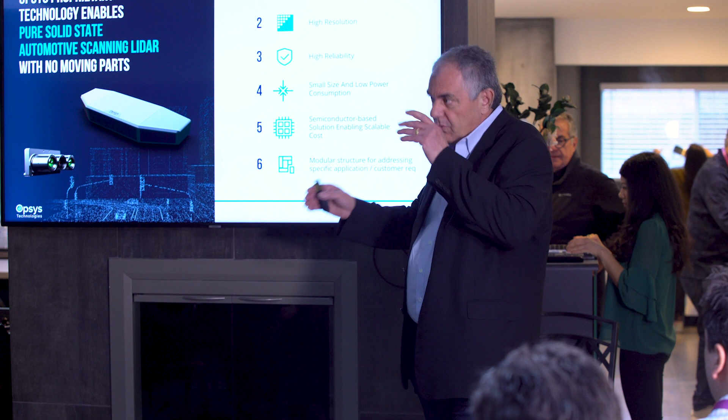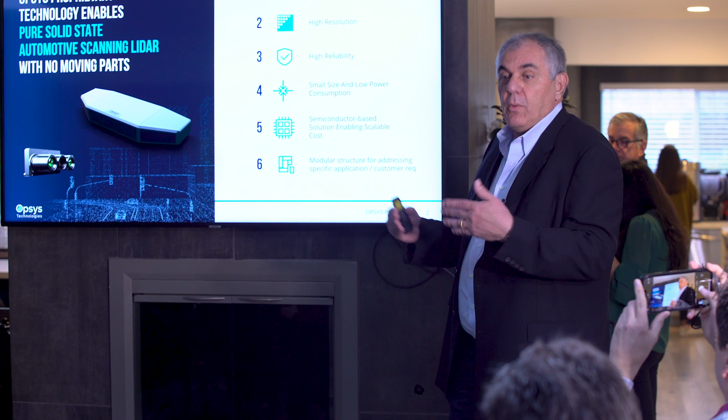So when we came to it, we said, first of all, we have to be very fast scanning. We want to give cars around a 30 hertz update rate of the field of view as a minimum. Mechanical LiDARs don't get there. Many devices at the show quote 10, 12, 20 hertz, but at maximum distance and maximum resolution, they tell you sub 1 hertz. Sub 1 hertz is not usable in automotive; you have to be above 10 hertz to be barely acceptable. We give fast scanning under all conditions.

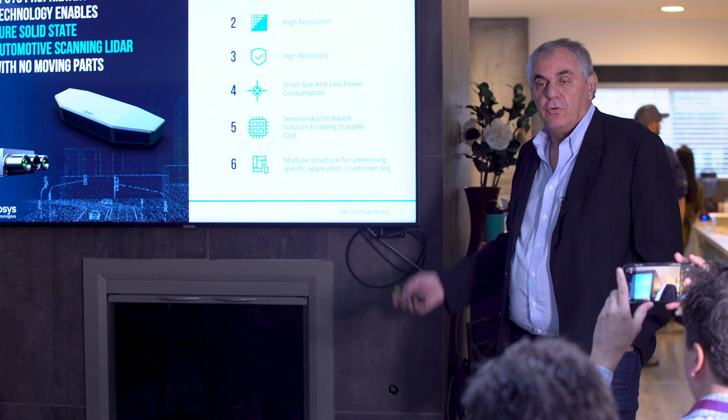Second, beyond high resolution and reliability, it has to be small enough and low power. It has to work over the full automotive temperature range, minus 40 to plus 85. It also has to be semiconductor based, so absolutely no moving parts, and made out of technologies which are scalable in production.

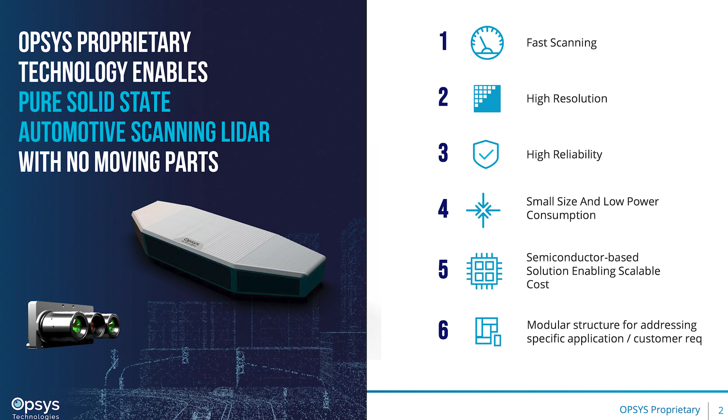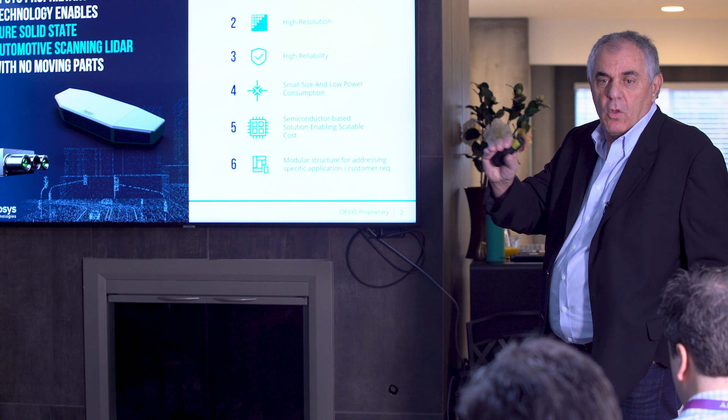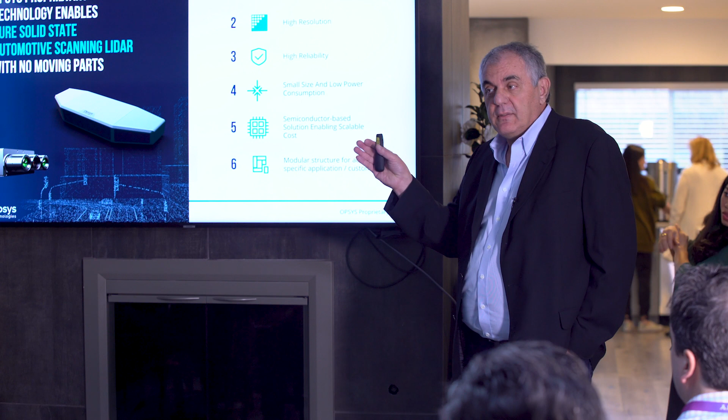So we chose the wavelength to be 905 nanometer, or around 900 nanometer. The reason is we wanted to use the laser family called VCSEL, a very efficient way of making lasers at low cost and large scale. Also, 900 nanometers allows us to use a silicon detector, basically a CMOS process, readily available everywhere. If we can accomplish a scanning LiDAR with no moving parts using those two material systems, it gives you the best of all worlds.

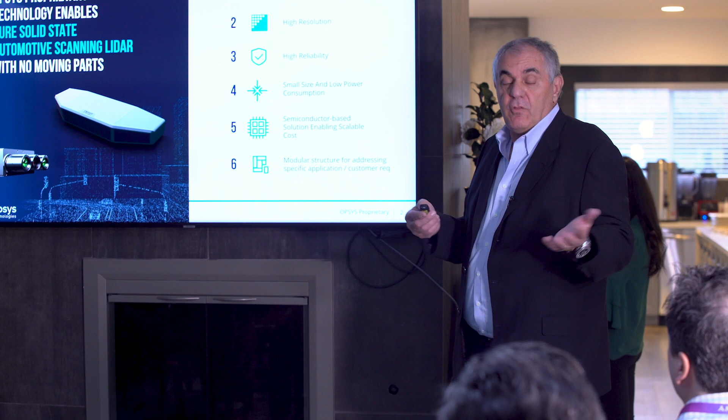So just for a status, we delivered automotive B-sample already in Q2 of this year to a number of customers around the world, Asia, US, Europe, and we're in advanced steps with many of them. One press release you see this morning is that Hasco, which is really an SAIC company, out of all the LiDAR companies chose to go with us, and that's going to go on the SAIC platform, so they're actually saying we're going to go to production in 2024.

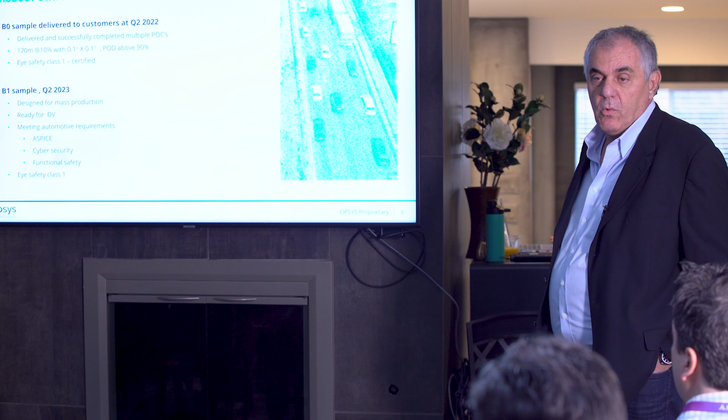Actually, it's limited by us. How fast can we go to production? They would go to production even faster. And in '23 in Q2, it's not going to be samples anymore. You're going to have the absolute final LiDAR, which incorporates all the automotive specifications, which is ASPICE, cybersecurity, functional safety, everything you need in automotive will be incorporated in our LiDAR.

So the first thing you say, okay, the LiDAR works by sending a beam, and all the other guys, when they scan the beam, they need a mechanical scanner to do it. How the hell are they going to do it? So the way it works is this. You can see that there's two squares on the side called addressable laser array, and one square in the middle called single chip SPAD. SPAD stands for single photon avalanche detector. Effectively, it's a very, very sensitive detector that can detect signal even at a single photon level, and it can be formed on a silicon wafer.

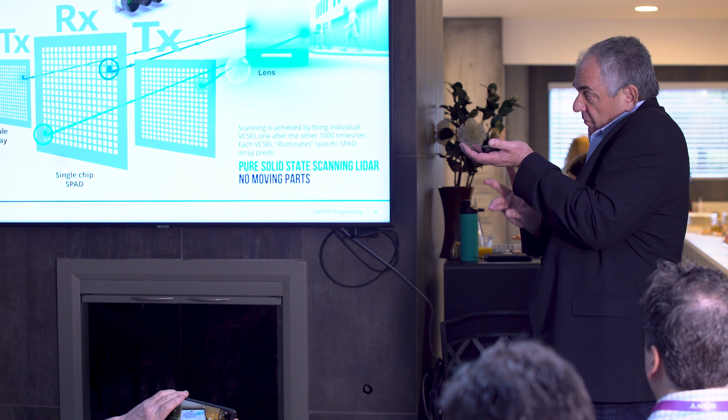On the sides, you see the array of lasers called VCSEL. VCSEL by itself is called vertical cavity surface emitting laser, but forget all the alphabet soup. Effectively, it allows you to grow the laser vertically in the wafer. When you grow the laser vertically, you can grow a lot of lasers next to each other. So you say, why aren't all the lasers like that? All the other lasers, you grow them horizontally in the wafer, and then you have to cleave the wafer and process them. That's a process that costs a lot of money, takes a lot of wafer real estate, and has a very low yield. 9, 10, 15% yield is like magical.

And the yield for VCSEL is just the inverse? I'm getting there. So the yield for VCSEL, because there's no post-processing, you grow the laser and it works. The yield is 95% plus. That's number one. You can't address everything in the world with VCSELs because VCSELs are not good for communication over long distances. But what VCSELs are perfect for is what we're trying to do, basically get a pulse of light and get it where we want it.

So what we have to develop is an array of VCSELs. We have thousands of VCSELs in there. But the array is structured so that if you define X and Y, like a checkerboard, we can control each laser separately. So it's a fully addressable matrix laser array. So what does it mean? If I put this chip in and assemble it, by a command from our internal processor, we can turn on any one of the VCSELs when we want, and then go to the next VCSEL, turn it off and go to the next one.

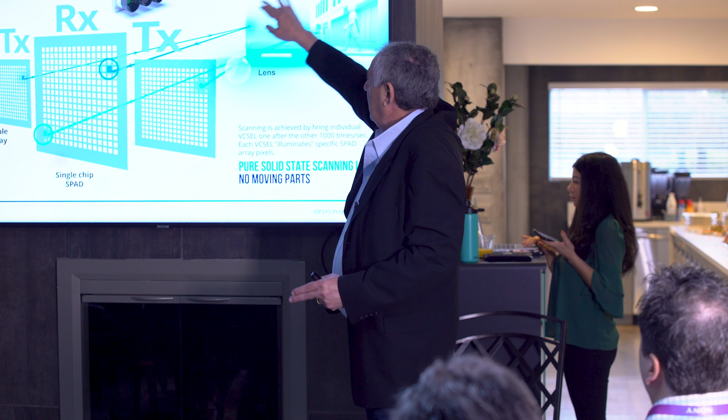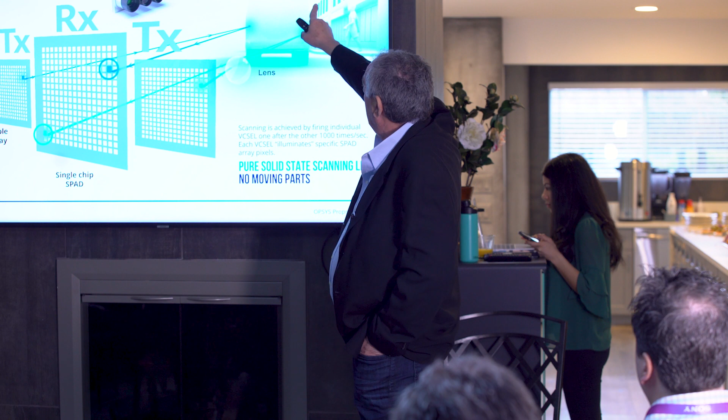So how do you use that to create scanning? You can envision the light goes from the chip that way into the board. You align the optics around the lasers so that, if you envision the whole field of view, let's say where the car is, the screen here, any path of light that comes from the laser when it turns on and goes to the target is addressing a fixed area in the field of view. So effectively, if I divide the field of view by the number of VCSELs I have, I have addressed the whole field of view.

So if I instantaneously address only one small area of the field of view with one VCSEL, and then I go to the next one, which is the adjacent point, by turning on and off all the lasers in all the arrays once, I did one scan of the whole field of view. Without a moving part? Nothing is moving. So, anything confusing? Any questions?

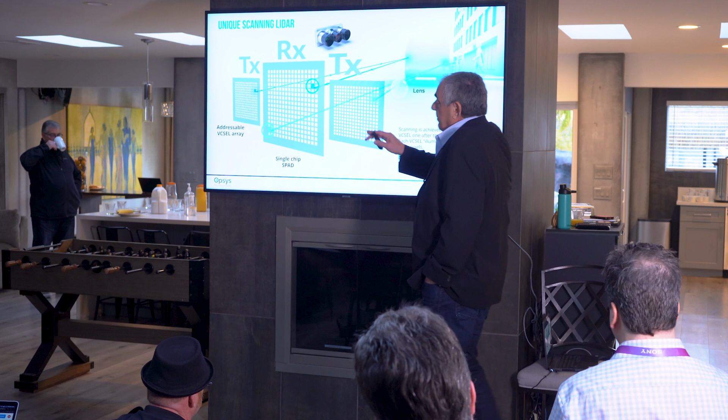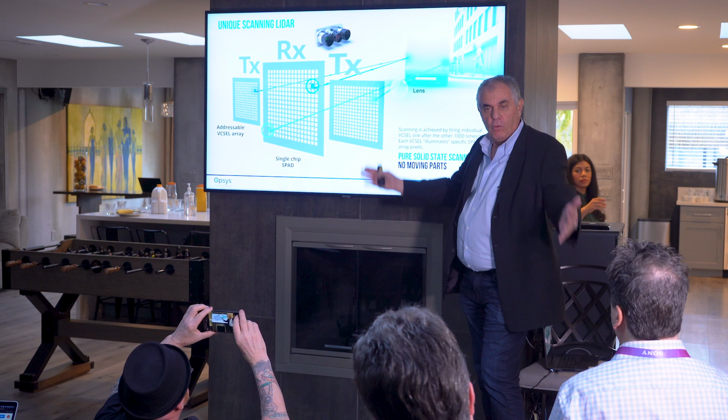So that solves the problem of the transmit. So basically, if I was able to turn all the lasers on at the same time, you would see dots next to each other covering the whole field of view. And each dot is relating to one laser all the time.

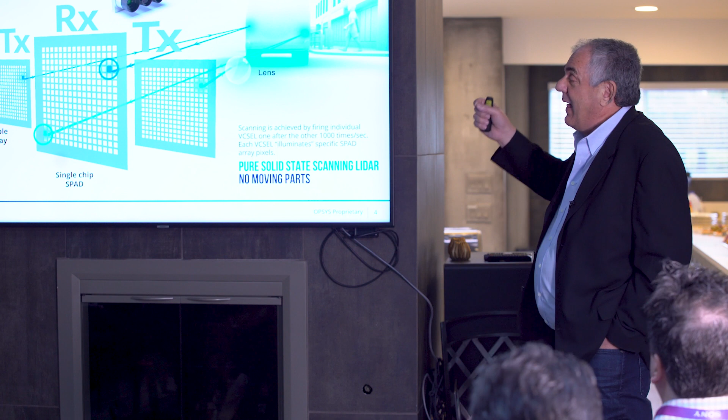Now, when I send this laser to that point, if there's any object in that path, it will reflect back a signal. But because those paths are set by the definition of the LiDAR, if there is something in that path, it will always be reflected to a specific point on the receiver. So what does it mean? Now I can align a laser with a receiver.

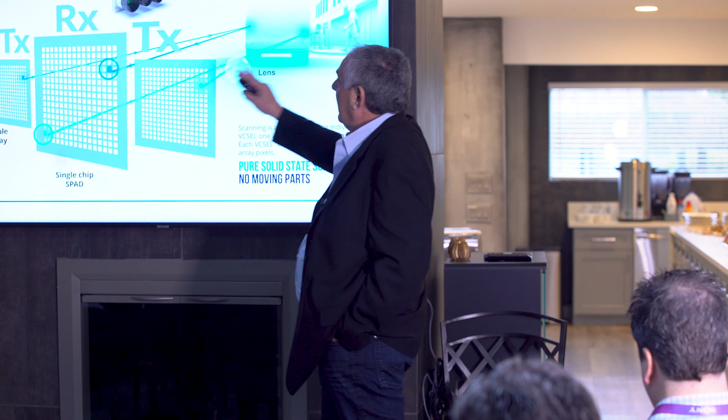So I have a system that by allocating a specific laser to a specific receiver, I can actually address, at a given time, the whole field of view, but one point at a time, one pixel at a time, or one small group of pixels at a time. Okay? So now if I can do it fast enough, I can actually get into LiDAR scanning, which looks like scanning without any moving parts.

So you can ask the question, how fast can you do it? We're doing it at 1,000 frames per second. So our raw data comes into our LiDAR at 1,000 frames per second. And if you take that data and you give it to the automotive, they're going to choke on the data. They said, there's too much data. I don't need that much.

So what we say is, okay, we take every point and average it 30 or 40 times before we give it to the automotive, to the ADAS system. And by averaging every point 30 times or 40 times or 60 times, you improve the integrity of the signal. So in LiDAR, range is one thing, scanning rate is another thing, but probability of detection is very important.

So if you tell me, oh, I have a LiDAR, I can go 300 meters, but my probability of detection is 40%, that's useless. That's not a LiDAR. I can't use it. Because there's going to be a lot of false alarms, or a lot of things I miss. So by averaging every data point 30 times, you raise the probability of detection over 90% for the full range of a LiDAR.

Yeah. No, it's not a question, it's against the light. You want me to?

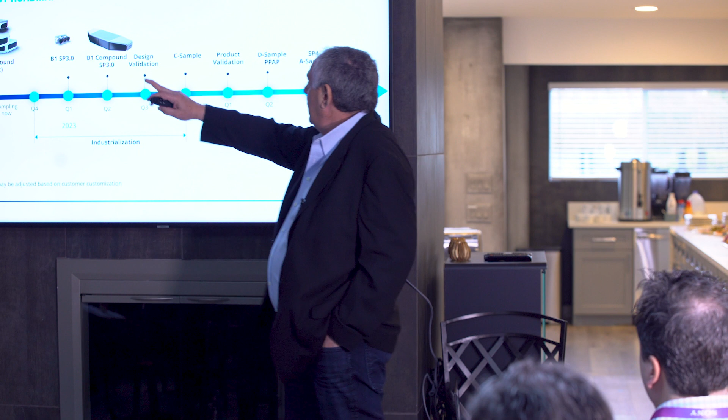You don't even see the point where you're stitching them. So this describes what we said before. We're going to go into production. Some customers would like to have this already pre-packaged, so we take a few of those and, depending on the specs, we put it in the box.

But the idea behind it is a distributed sensor. You can go to the car, you can put it inside the headlights, inside the taillights, in the B pillar, behind the windshield, anywhere you want. You don't have to change the car shape in order to include LiDAR functionality in it.

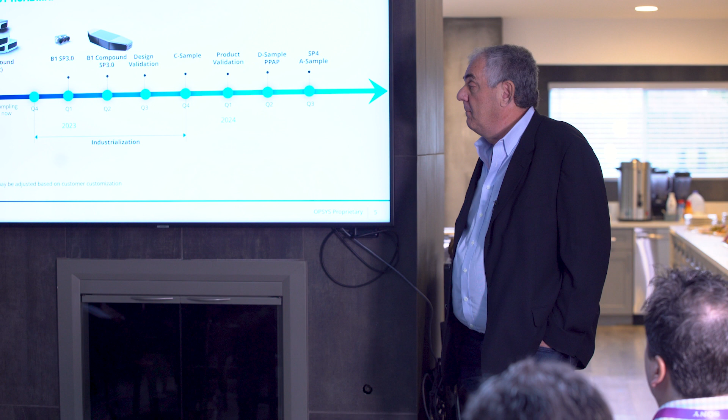So this, like I said, this is our LiDAR. All the structure of the LiDAR is gallium arsenide-based VCSELs and a silicon-based detector and some silicon electronics to support all that, the microprocessors and memories or whatever we need in there.

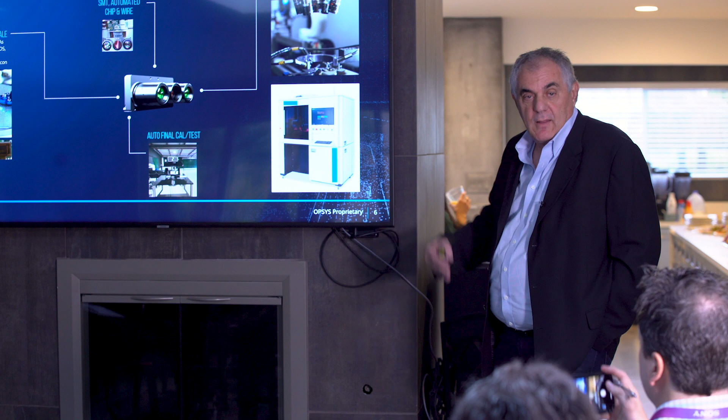But effectively, gallium arsenide capacity around the world is sort of infinite, because when Apple decided to put a face sensor in their phone, everybody and their brother built a fab. Now the fabs are running at 40 or 30% capacity. Capacity is not an issue.

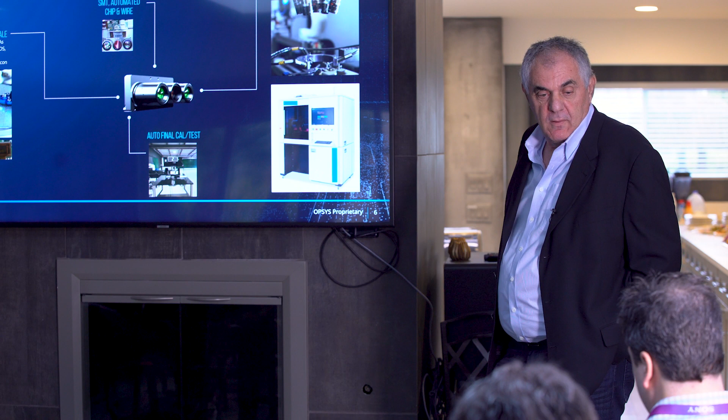And by the way, that's what enabled us to use those lasers in here, because before that happened, gallium arsenide processing was about 100x more expensive. So once the costs have gone down, that enables you to process this much more cost efficiently. And wafer size is growing. You're talking about 6-inch wafers and 8-inch wafers.

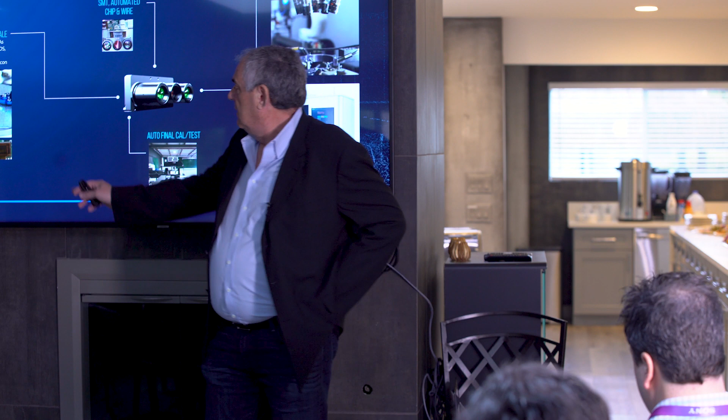The second thing here on the wafer side is the detector, which we talked about, the array of detectors. It's done on silicon, a regular CMOS process. Again, capacity is a non-issue. So the two main materials or components that make our LiDAR exist in high quantities, and we buy them in wafers. The more wafers you buy, the more components you have.

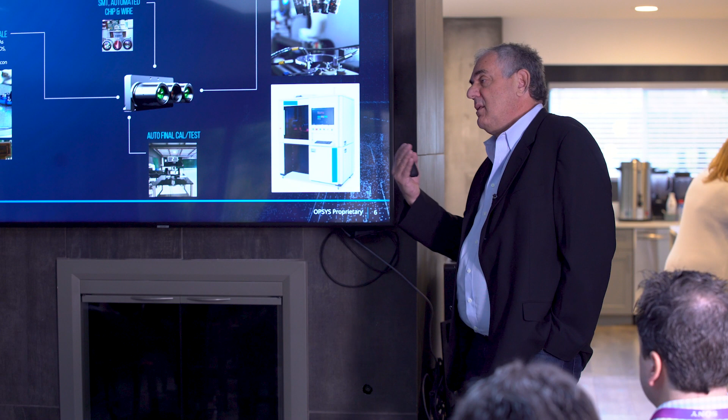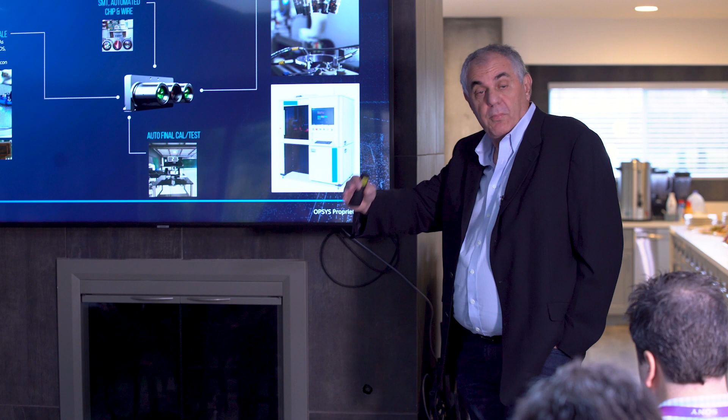And what it gives you, it lets you enjoy the cost efficiency versus quantity of any chip used in manufacturing. Like you make computers or phones or any other product that uses semiconductor chips, they have the same cost efficiency. The more you buy, the more cost effective it becomes.

The second thing we do, because we don't have any moving devices, and by the way, I don't know if you can see it well, but this is how our device looks. So you have the lasers in the center and some ASICs around to drive it. So it's all basically planar, so fully automated machines can make a LiDAR. The touch labor content of the total cost of goods sold here is less than 10%.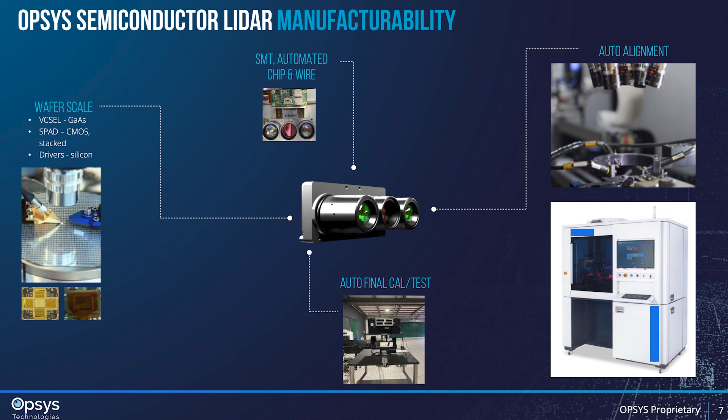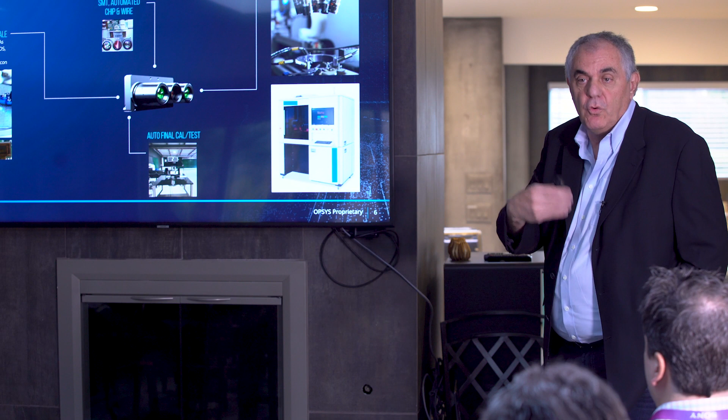So what does it mean? It means I can have a scalable cost. I'm controlled by material cost, so the more efficient our material cost becomes, the lower our cost. And that's what automotive people want. I'm going to buy for 1 million cars or 2 million cars. The more I buy, I want to still see the cost going down. And that's what this approach enables.

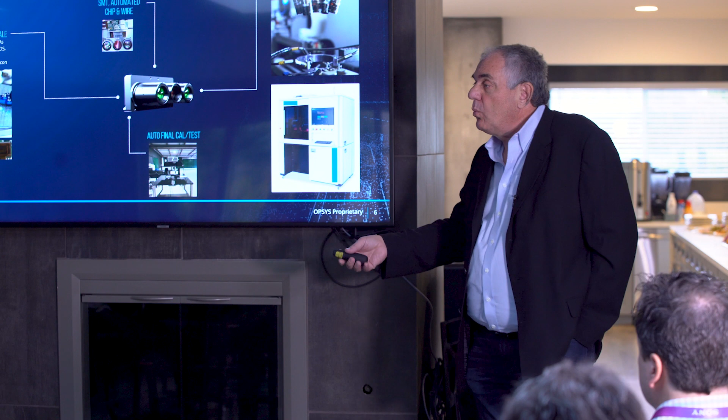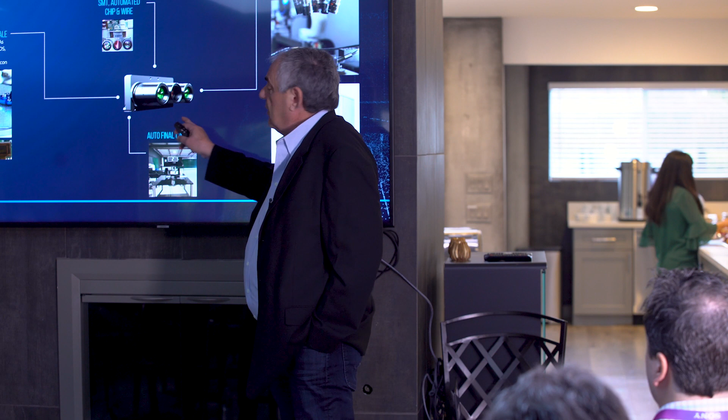Plus, it has no realignment. You put it in a car, there's no mechanical movement. You don't have to come next year and see if the bearings are still working, or any other movement or recalibration for temperature. It's set and forget for the rest of the life of your car. And all this is going to be done at our contract manufacturer in Thailand, and it's a fully automated assembly process. So again, no touch labor.

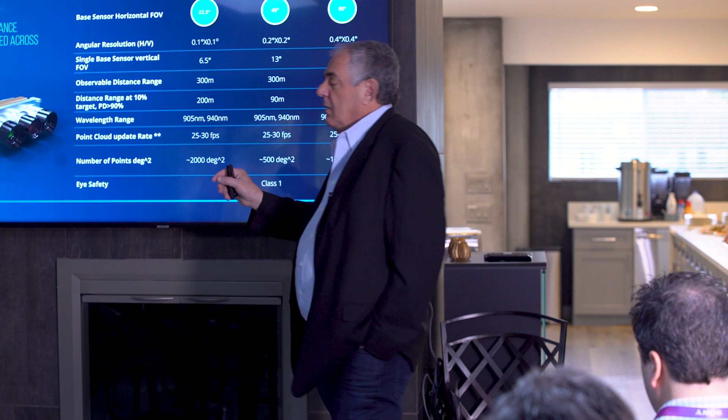So this is just an example. Like I said, if you take everything from this point backwards, the lasers, the detectors, all the electronics are the same. And if you want to address different resolution or different field of view, you just change the lenses. So by changing the lenses, you don't have to requalify the product. The product is qualified for automotive and can be optimized for any customer by changing just the lenses, the optics in front of it.

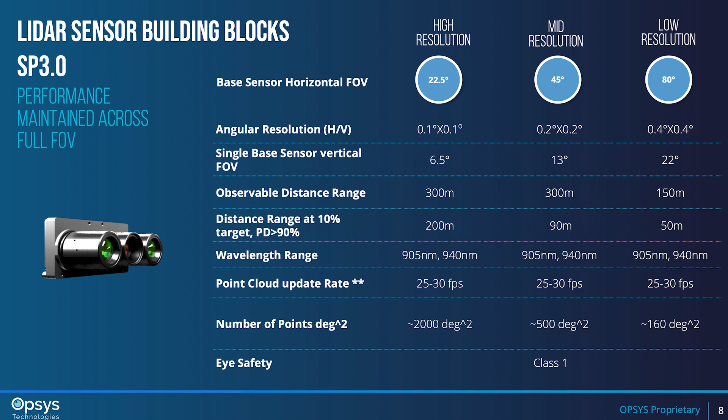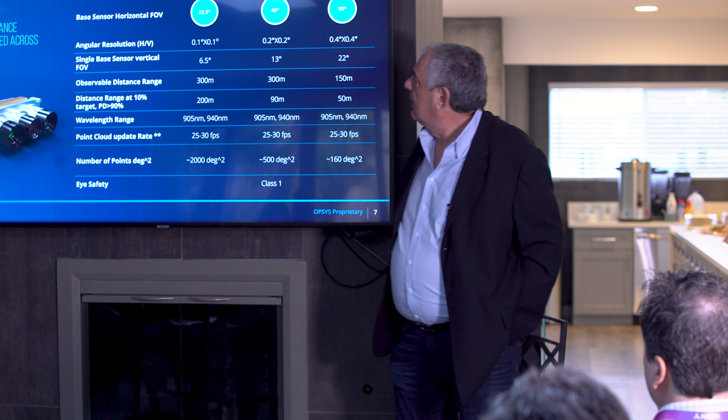And these are 3 examples. If you have 0.1 by 0.1 resolution, 0.2 by 0.2, or 0.4 by 0.4, just changing the lenses allows you to address that. And you see that the field of view is changing with the resolution. So you have 80 degrees field of view at 0.4 by 0.4, which directly translates to 45 at 0.2 and 22 and a half at 0.1. Anyway, it's a mathematical relationship between them.

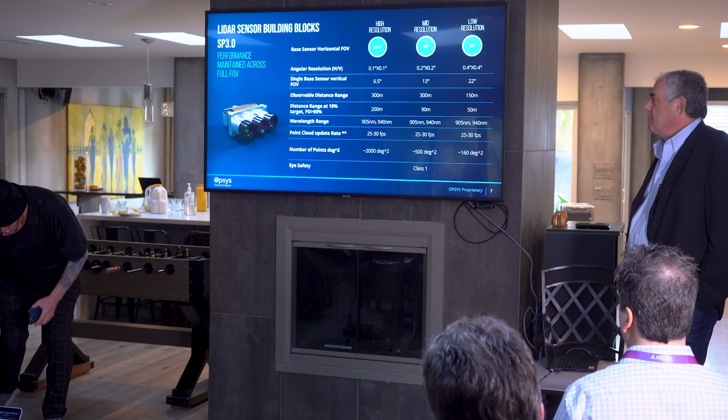Eitan, I'm sitting here because they've been through a lot of specs. So if you could help them understand, on each of the categories, where you sit against your competition, does that make sense? I can, but you have to be specific, because number of points, yeah, we have the highest number of points per square, but effectively, the number of points is mathematical. So it's the number of points per second.

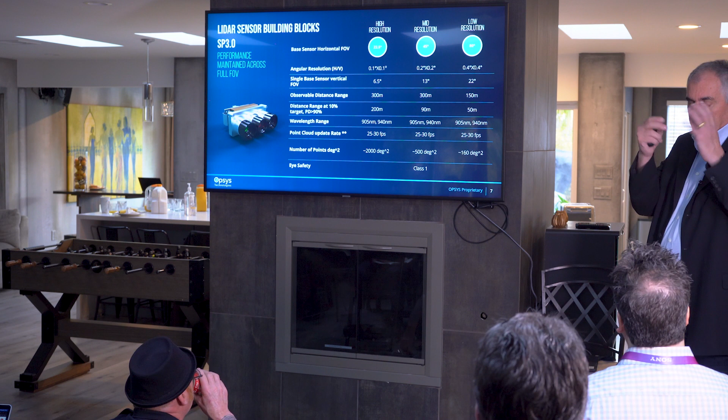So first of all, you have number of points, which is resolution. So if you have a degree by degree, and you say I'm doing 0.1 degree, so it's 10 vertical, 10 horizontal. So on a degree square, you have 10 by 10, 100 points. But then you have to multiply it because this unit is degree squared per second. And per second is the number of scans you do, multiplied by this number of points. So if we do more scans than anybody else, we have more points.

Gotcha. And more points give the customer or the ADAS more accuracy, more data to work with, more update rate, more real-time type performance. So that spec is the most important. That spec coupled with probability of detection and distance altogether is important.

That's our point. When you go to the show, you hear all those anecdotal numbers. You say, oh, I get to 300 meters. Oh, I do this resolution. But can you do them all together all the time? And the answer is no. We do them. We do all specs all the time. But if you ask the question, they say, oh, it depends. It doesn't depend. I want the full probability of detection for the full distance, and I want the number of scans to stay the same for any distance I'm concentrating on.

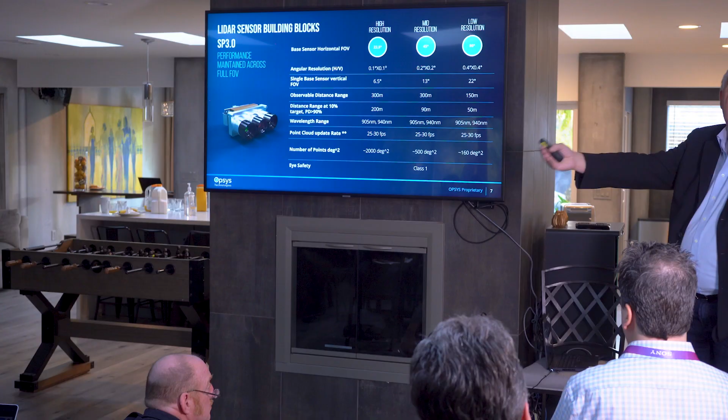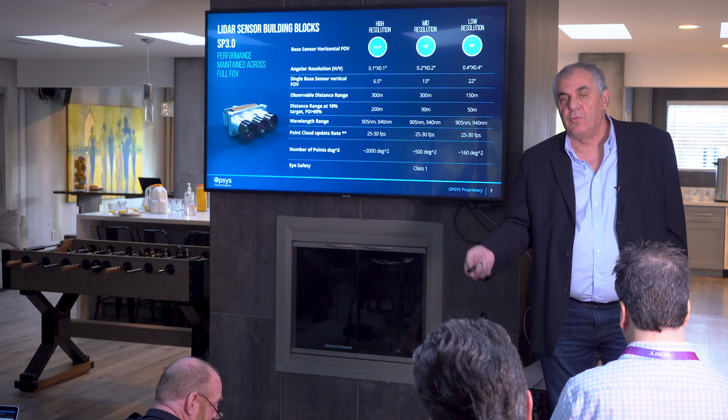So in other words, as they ask other LiDAR companies or sensor companies, and they claim a range, ask them, what can it see at that range? Well, if they give you a range, ask what's the probability of detection at that range? Yeah. And it has to be defined at what reflectivity, at 10% reflectivity. And the second thing is, how does your scan rate for a specific resolution change versus range? By those two numbers, you get deep in it. They won't answer you anymore. They'll go to the next guy.

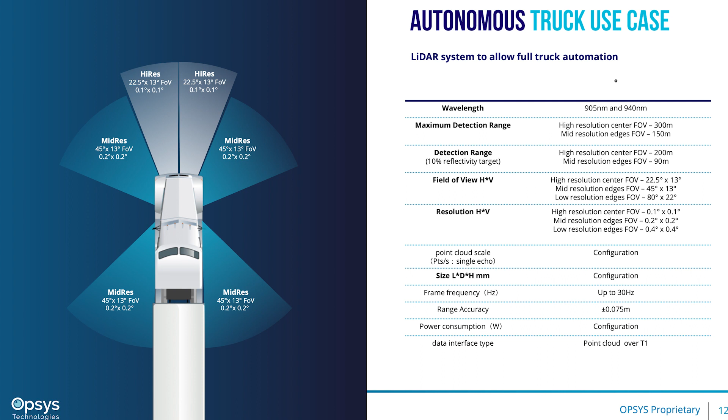Here's another example on trucks. So trucks on the forward, they look the same as cars. Same idea. Maybe they want more high resolution because their stopping distance is longer, they need to make a decision faster. But on the looking back, if it's a full trailer, you're looking 40, 60 feet on the side of the trailer. You're susceptible to sun loading, you're susceptible to many things. So people used to put cameras in there, and the camera will tell you, yep, there's something there. I don't know exactly where that is.

And the LiDAR can tell you not only there's something there, it tells you exactly where it is in relationship to the truck, and it covers the full elevation of the truck. So when you want to turn the steering, you can put a system that actually will limit you, so you're not going to hit that obstacle. It's not just telling you there's something there, it tells you exactly where it is dynamically, and it tells you what to do. And apparently that's very important for truckers. So you can put one of those LiDARs on the mirror looking back, and the rest of them looking forward.

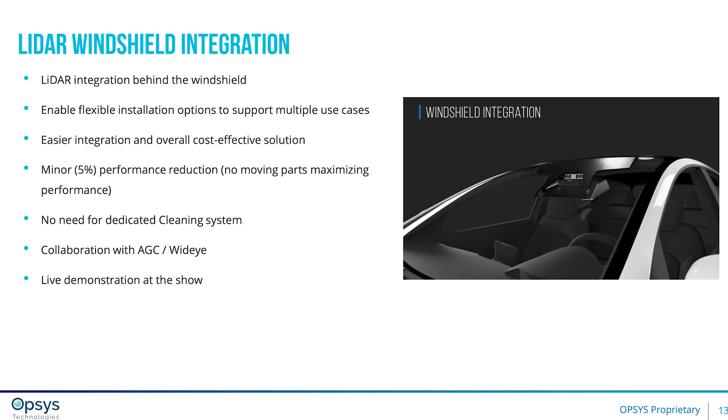And this is what we talked about behind the windshield. First of all, you have to have a windshield that actually can pass infrared, our wavelength, and that's why AGC make that windshield. Then it's readily available too. And the second thing is embedding the whole system behind the windshield, so you don't start worrying about how I'm going to clean it, how I'm going to wash it; all these other things suddenly disappear. And you're replacing a camera system with a LiDAR system, and you don't even know. It doesn't even interfere with your car volume or anything else. So again, you come to our booth, you can see it working behind the windshield.

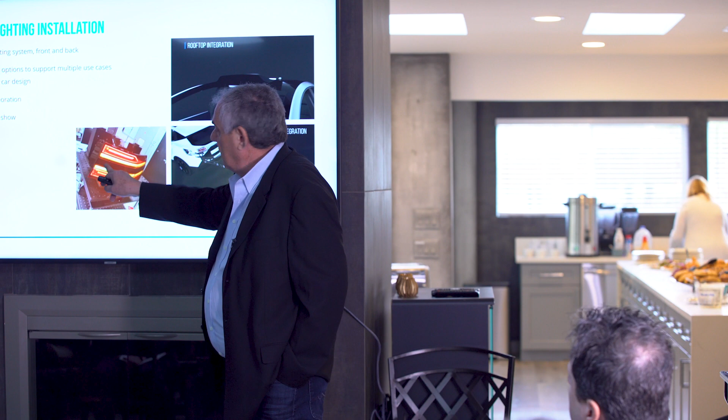This is what we talked about, the rear light, embedded right here in the rear light. You don't even see it's there. And again, you can see it live operating in our booth. That's in partnership with a company from Korea called SL Photonics. SL World and SL Photonics. And they're manufacturing those systems for a lot of people.

So here's a lot of things you can hear from people who make LiDARs. They all talk about ROI, which translates to a region of interest. So what they do is, because the LiDAR does not have the scan speed or the resolution, they said, oh, when I figure out there's something there, I'm going to go there and limit the scan of my LiDAR so I can go very fast on a much smaller area. But when you do that, you lose the rest of the field of view, and how much is the benefit.

Then if you say, hey, I have 2 areas I want to do, you can define 2 of those or 3 of those. It doesn't matter. So you can define dynamically where it is.

And with our system, you can change it on a scan by scan basis. If you do one scan and you say, I want them to be here, and you then do another scan and say, I want them to move to the other place, you can do it. So there's no delay. There's no mechanical system that has to move and adjust. It's on a real-time basis. Obviously, you have to have the scans themselves, but it's on a real-time basis.

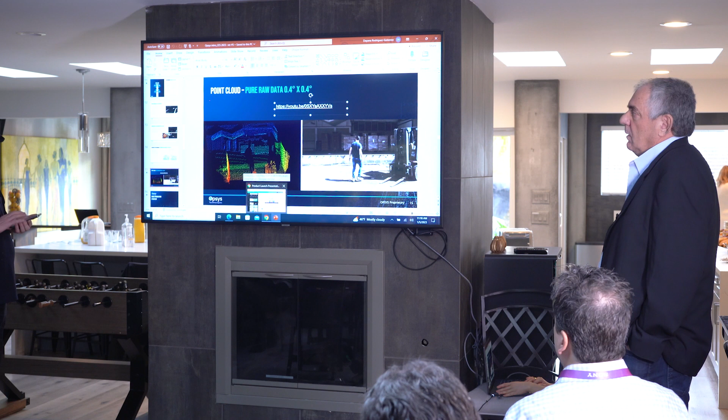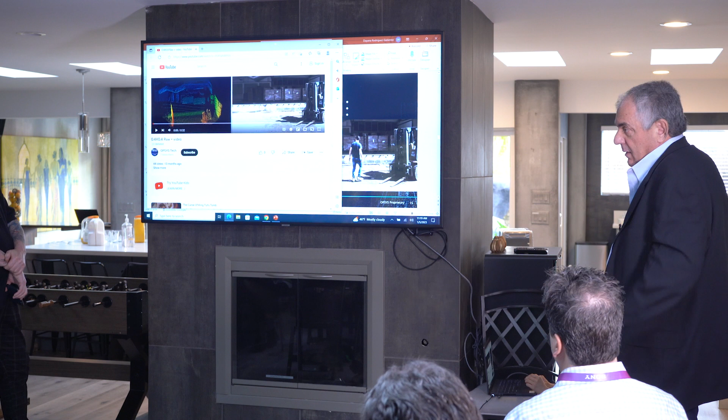Can I ask? Sure. If you have a car that's like level 2, like say that Volvo EX90, are you going to want to have 1 LiDAR? Are you going to want to have 2? Want to have 4? So it depends what Volvo wants to cover as far as field of view. You say, if we go and replace Luminar on the Volvo, how many LiDARs we have to put in there to cover that? I mean, it gets into the cost thing. If one's 150, 4 is 600.

You'd be surprised how much the Volvo system costs. I would tell you, I don't know what they cost, but I'm telling you, we're more than competitive. Okay. Immediately. Even forgetting performance and forgetting reliability and forgetting all this other stuff. But you're going to want more than 1. Yeah, you can put 4. But their system, when you say 1, I mean, those galvanometers cost money. The manufacturing costs money. We're going to be at least more efficient, if not much more, from a cost point of view. And performance is a performance, that's a given.

I'm not trying to undermine Luminar. I mean, they do what they do. I'm just saying, when we look at those applications, we compete head-to-head with those specifications. And the cost, obviously. Okay?

Can we run that video? So this is a video just as an example. So what you see here, obviously it's a LiDAR, but this is a raw point cloud. There is no video processing, there's no video overlay, there's nothing. You can see the forklift, you can see the person moving in there. I mean, it's all on a real-time basis. You can see what's going on.

And the number of points, you can see right away how high the number of points is, because it almost looks like a video. And each point in there is a 3D coordinate. Each pixel in this picture is a 3D coordinate. So what does it mean? We can take our viewer, that wasn't included, we can take our viewer and we can move it so you can look from the top, from the bottom, from the side, anywhere you want, because each one of them has 3D coordinates. I think that's it. Yep, that was it.

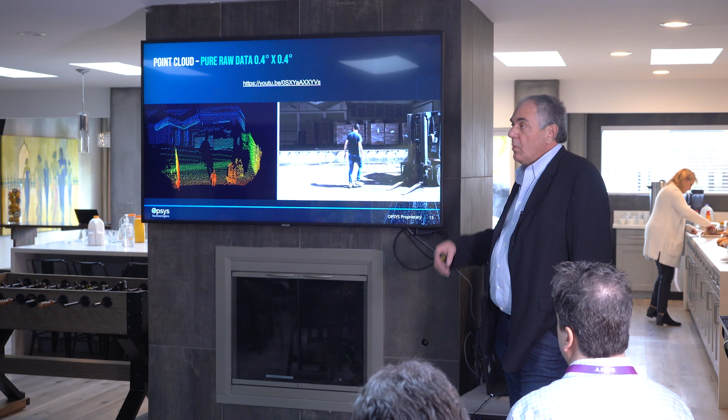We have some press releases related to behind the windshield and headlight, taillight integration, but this press release came this morning, saying basically we're going into production with the first customer in China. And by the way, when you look at the world from a demand point of view, in the next 2 years, all demand is going to come from Asia, mostly China. The European and the US probably will follow in the '26 time frame and up.

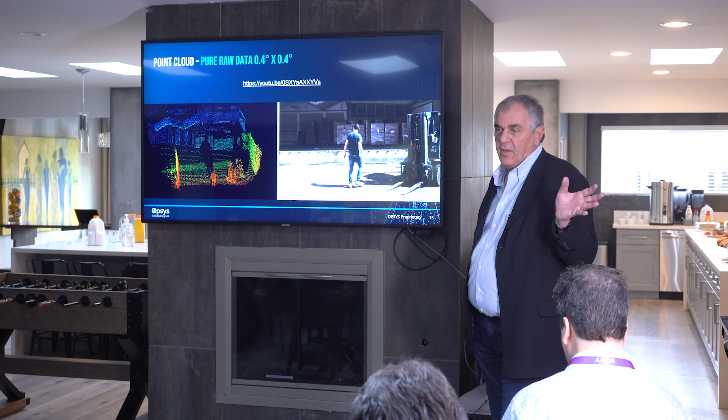Could you just mention your customers? So we said Hasco, it's in the press release, yes. And the way we work in China, we work with 2 leading tier 1 guys. One of them is Hasco, there's another one, press releases to come. And each one of them addresses, like SAIC is the owner of Hasco, but there are other big customers they're addressing.

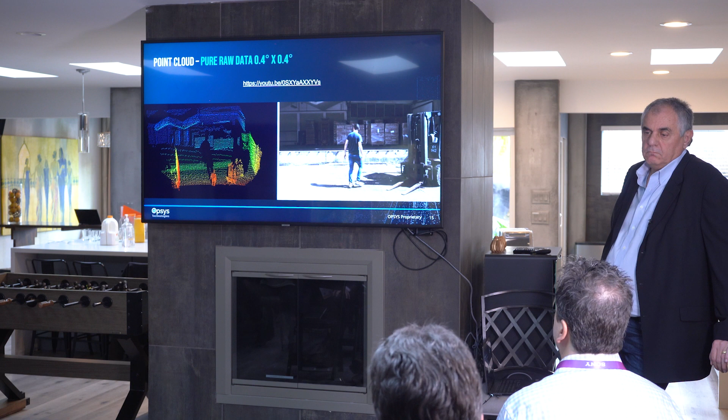Yes? I don't know how to ask this, but I know they want to know. Okay. So there's a skepticism about autonomous LiDAR, and when are the big deals going to be, and what volume and when? And I know you can't say volume, but can you give us a sense, and maybe make it broader for the industry. This deal is going to be a high volume deal, and pretty soon. Can you characterize it in any way? We expect in '24 to make multiple thousands of LiDARs. Multiple thousands, it's under 10, more than 5. And we expect in the following year to go 10x.

And the growth beyond that should continue on a similar trajectory. There's only so far you can go, 10x, but still it's going to grow in a pretty steep slope. And that's only addressing China. So China has, I don't know, about 20 million cars a year. And through our customers, through one customer, we have access to like a quarter of this market. And they committed by '25 to have 6 million cars with LiDARs manufactured per year.

So that's obviously not in those numbers. Those numbers are much more conservative than the 6 million number. Right. But yeah, they're moving forward. And in China, it's not an economical thing. In China, they decided they're going to have LiDARs in the car, then they're going to have LiDARs in the car.

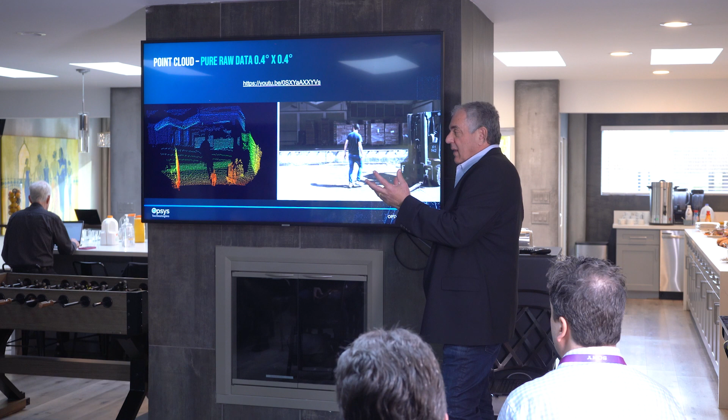So, in the car that your LiDAR is going to be installed within, what is the most advanced autonomous functionality that's going to be? So as you understand, we work with Hasco. Hasco is the ADAS system guys. They decide on the autonomy level. Our LiDAR can play in any of the autonomy levels. So we think it's either L2 or L3+, because L4 is a few years away, and then L5 is away.

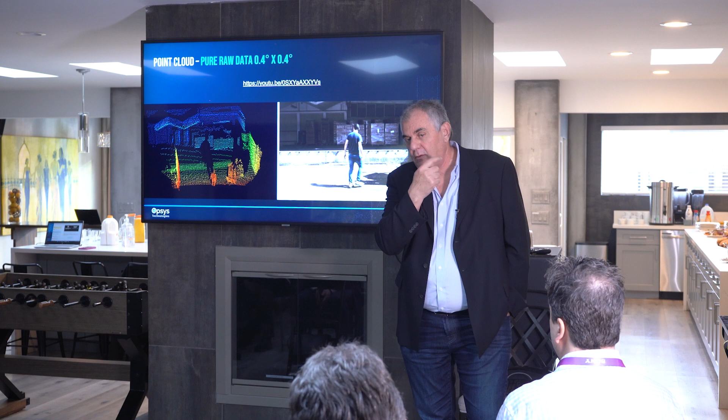But effectively, like we said, we give them point cloud. They go and they do object recognition on a point cloud. So if their system says, I see something there, I don't know if it's a ball or it's a cat or whatever, then they can put an ROI on it and they can focus on it and see more clearly what it is. But they decide on their system how they want to address specific objects. We just give them the point cloud and the access to the ROI.

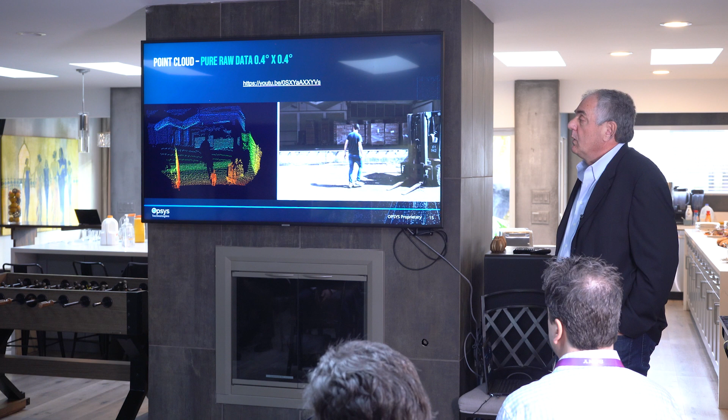Just like a camera. Yeah. It's got a multifocus camera. When you push the button, you can see it. You can focus on 9 things at a time, but they put those squares on it. So they find something there and they focus on it.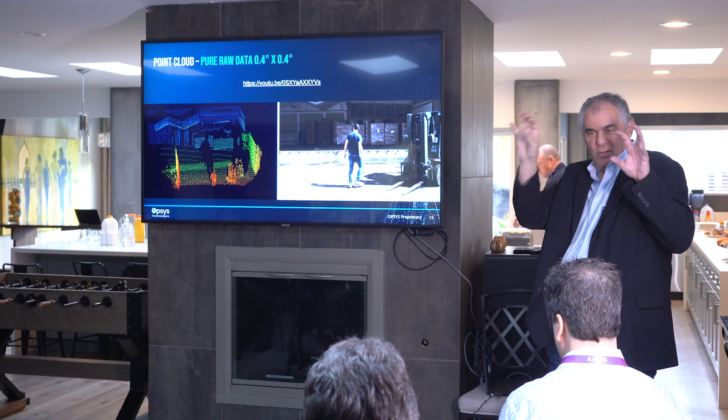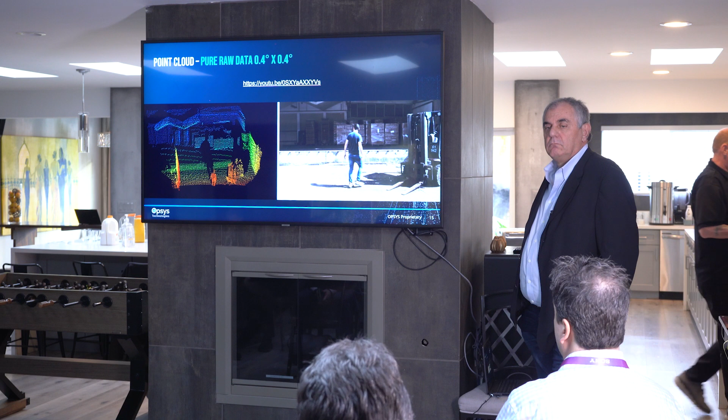I'm curious just about the overall growth in knowledge base of this industry, and how much you've seen that become aware of best practices, or is there shared intel on how many you should focus on, and how much did that become part of the collective knowledge, or is that very proprietary? The honest answer to you, we can give them access to do whatever they want to do.

They need to decide how to do it because they need to define, if I have so many threats at a given frame, maybe I should stop. But that decision is not by us. We don't take the liability and we don't make those decisions for them. So that's why they get paid the big bucks to do this other stuff. But what we give them is the best point cloud and the ability to concentrate on whatever they want.

But I'm sure artificial intelligence tells them it's too much, it's too little, I should do it, I shouldn't do it. But that goes to all the object recognition that they do.

Yes? High-performance LiDAR is typically used by high-performance cars. So the question is, why have the Germans not made contracts with you? We do not have German contracts, but we have a lot of German interaction with a number of big companies in Germany. Now, what's the rate of them going to production? I don't think they're going to move as fast as the Chinese, but they're probably in the '25, '26 time frame. So we're there to serve them.

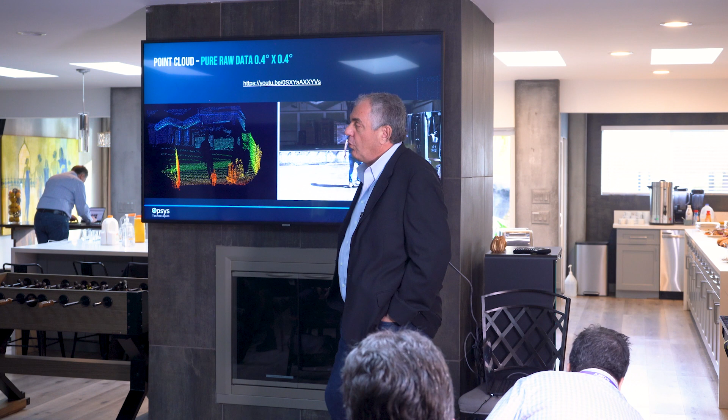We are working very tightly with them, with a number of either tier 1 companies or automobile companies directly. We have been tested by them and are continuously being tested by them. Whatever they put in production already hardly gives you L2 from the systems they have access to right now. But we expect that to be a significant part in Germany, but not in the immediate future.

Several car manufacturers and suppliers yesterday said that the hype of autonomous driving is over. So that means that now they want to sell more ADAS systems, and they see a fully automated car in a far future. The answer to you is we don't care. We'll sell them sensors for parking, and we sell them sensors for up to L5. Whatever they want, they'll take. But we said our sensor technology fits all of that.

Yeah. The issue they have is more of how do you manage the car when you have the image? The reason is not that LiDAR is too expensive or the systems are too expensive. The reason is that they can't find a way to make the system safe enough in terms of traffic accidents with pedestrians, with bicycles, and regulations. That's very, very conservative now.

And the second thing is how do they convince you to get in a car without a steering wheel? Because you're gonna get a heart attack. It's like I don't want to sit in that car. In the government, yeah, regulation is another point. Yes. But the L3 can be very helpful.

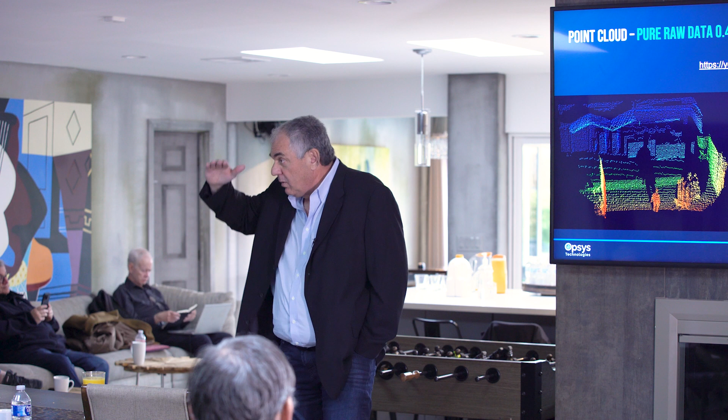And on the L4 systems, when you get to more of trucking, in the US I saw ads on TV, they pay $120K for a driver off the street to come and drive a trailer. So they say, if I have a system that reduces the threshold and makes it much easier for a driver to be trained, I can hire low-cost guys to drive big trucks, and they have to make fewer decisions. That's not full autonomy, but it's in between, and there's a return on investment because once you put it in a car, you reduce the cost of the driver.

Right. So, Eitan, I know you've got to run. I do think there's one question that half the group knows, but half the group hasn't met you before, so you may feel like you've said this before.

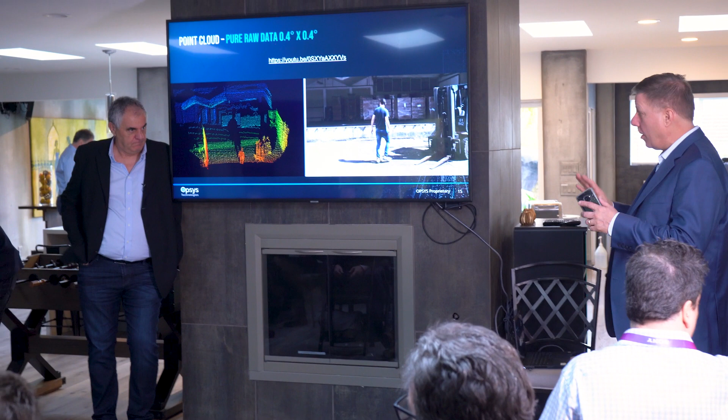When I met you, I felt like you came at this problem from a very different history than almost all other LiDAR companies. Can you help them understand your experience in the other companies and how you arrived at this? So it's not me, it's we, the whole team. Basically our history was in communication: startups, companies making lasers, laser systems, communication systems, internet, cable TV. We were the largest in the world in all those modules, from growing the lasers all the way to supplying the systems.

But at some point, after 25 years, it just started getting boring. It's the same thing. So we decided to do something more fun and get into the automotive business. Automotive is a tough business, but once you get in, you're in. In telecom, every buyer comes to you every quarter and says, where's my 15% reduction in price? Because I have competition here and there. In automotive, you have a platform for 10 years. Yes, there's going to be price reduction, but it's more stable. Plus, everybody loves cars, so we like to do something different.

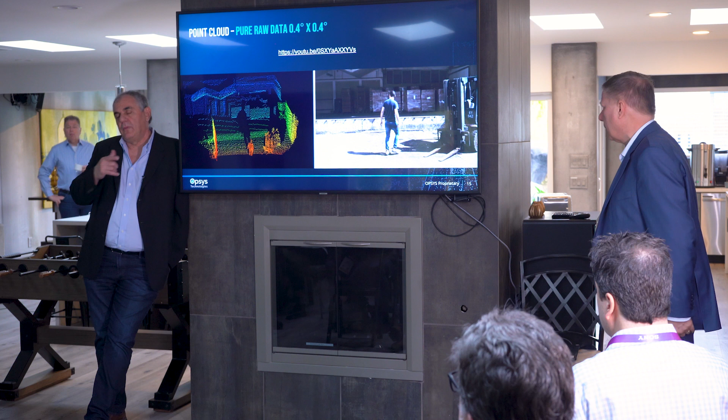And the other guys, no knock on them, but were they coming from an optical background? So we come from the optics side of things, and if you look at the history of companies, a lot of startups find the best way to lose money in optics in a big way. A lot of the other guys come from the electronics side and treat the optics as something you can buy. We think the most complicated thing in the LiDAR optical module is the optics. Knowing how to make things in millions per month is what makes this thing go.

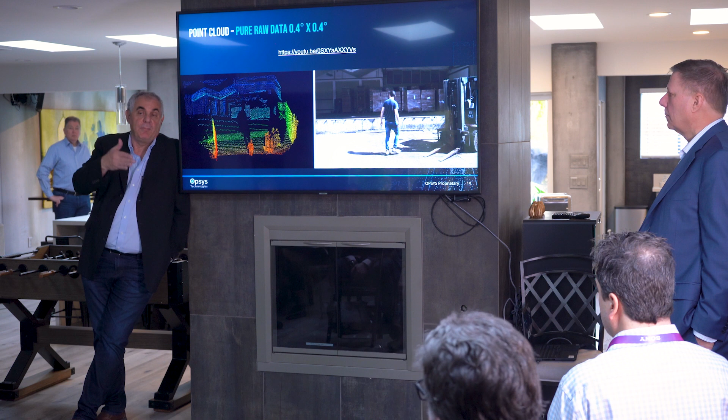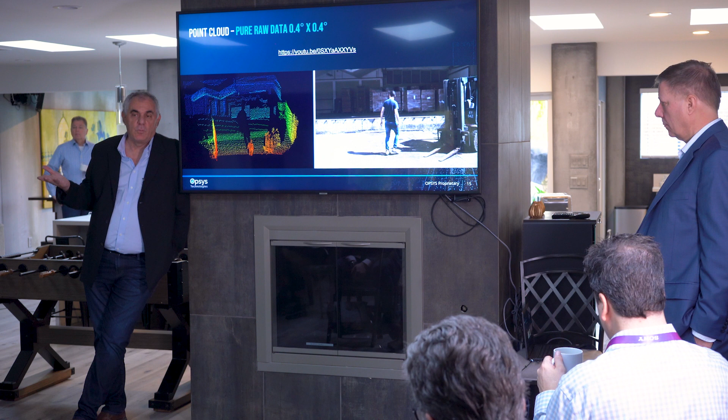So other than performance and specs, it's how can you make millions of parts per month, per year? How can you make them profitably, in a cost-effective way, ramp and make money? We come from the background where the toughest part is the optics, and other people come from either the software side or the electronics side, and we think some of the limitations lie there. But I don't want to undermine anybody else. A lot of people do a lot of hard work. We just look at the problem differently, and we think we have the optimum solution.